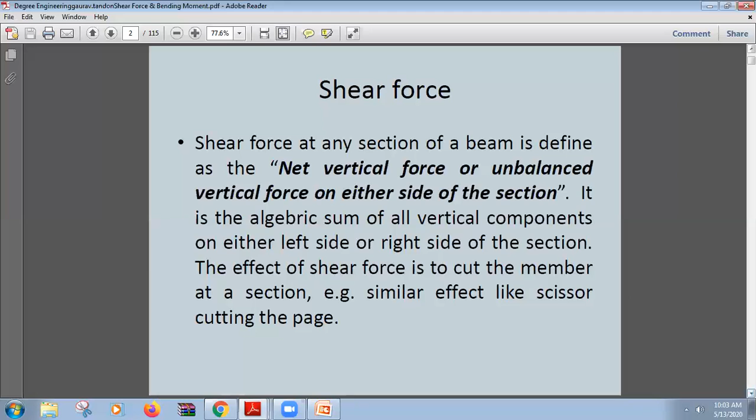On certain sections there are forces that are not balanced. These forces are known as shear forces, and they try to tear the beam apart into parts. So this is shear force: the net vertical force or unbalanced vertical force on either side of the section. Now we'll give an example like this.

You can see here, this is an example. This is the body, in which two forces are acting superficially on the surface of this body, one in upward direction, another in downward direction. Like here we have the example: this is the beam, and this beam is supported by a column, so the upward force is acted by the column.

On the beam we have loading, with the clear span being the part where the beam is not supported. The force vertically applied by the column is this much, and at the same time there is a load on the beam acting downwards. So these are two parallel and opposite forces, trying to tear off this body. This is called shear force.

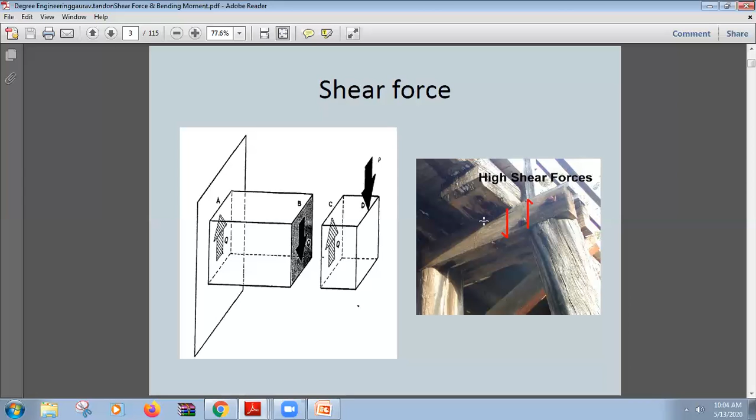Now come to the sign convention. If we take any section of any column, and the force is acting upwards on the left side, it will be positive shear force. Whereas if the force is acting downwards on the right section, it is known as positive shear force.

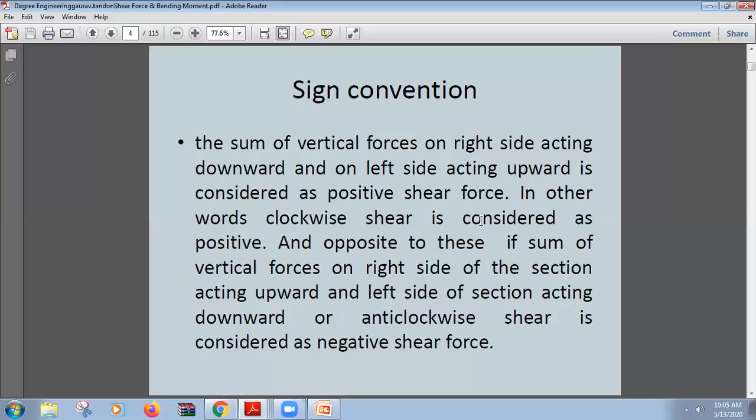Let me come to this picture and show you. If the force is acting upwards in the left section of the beam, this is known as positive shear force. Or vice versa, if in the right section of the beam the force is acting downwards, it is also known as positive shear force. And the vice versa is also true: if in the left section the force is acting downwards, or in the right section the force is acting upward, this is negative shear force.

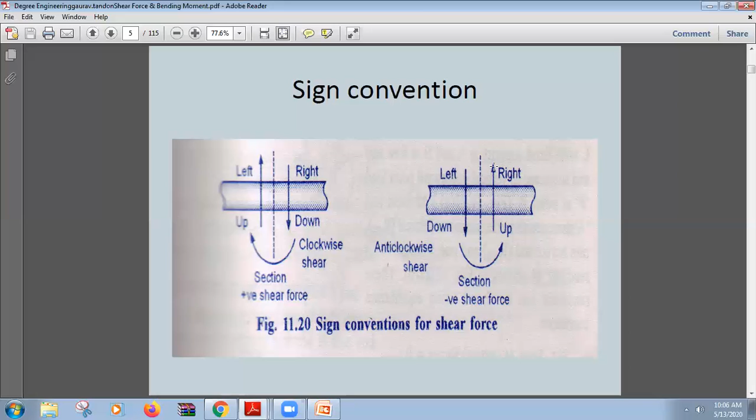Shear force is quite easy and simple. You only need to keep one thing in mind: check the left portion. If it is upwards in the left portion, then it is positive shear force. If there's no clear indication on the left portion, go to the right part and check whether the force is acting downward, which is positive shear force, or the vice versa. If we find the left section has force acting downwards, or the right portion has force acting upwards, this is negative shear force. This is quite simple and clear, I hope.

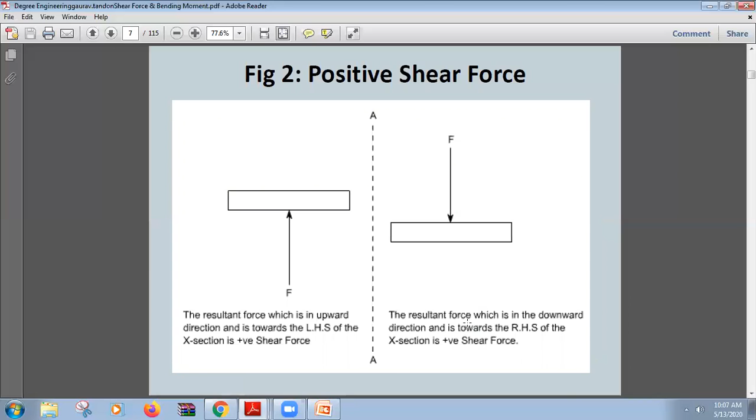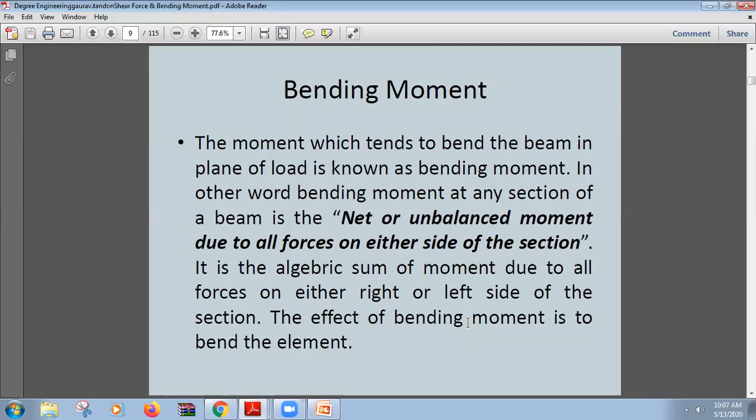Now, bending moment is a type of moment that tries to bend the beam. So moment, as we know, is a product of force multiplied by perpendicular distance.

Let me tell you about the sign convention. There are two types. If the beam is bent such that its belly or stomach is downwards, it is positive bending, and this condition is known as sagging.

Sagging, like we see in our homes, where we have a wire on which we put our clothes to dry in the sun. If the wire bulges downwards, that is known as sagging.

The reverse case is known as hogging, where the convex or center point comes up, and the bending moment is taken as negative. We just need to keep one thing in mind: if it's sagging, the convex faces towards the earth, beneath; the opposite direction is known as hogging.

So in sagging, the upper part is compressed, whereas the lower face is under tension, meaning the lower face expands and the upper face compresses. Similarly, in hogging, the upper face is in tension and expands, whereas the lower surface is under compression and contracts.

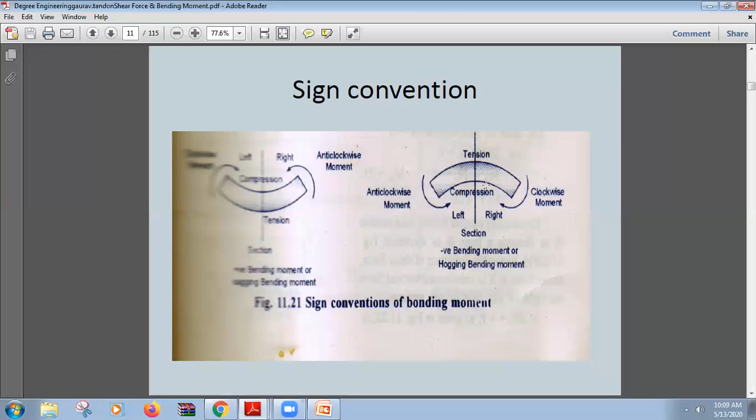So these are the two sign conventions of bending moments: sagging and hogging. For sagging it's positive, for hogging it's negative. Now these two are shown here: sagging as positive bending moment, and hogging as negative bending moment.

Now we'll study the first beam. We talked about the types of beams we have studied, and at the same time we studied the types of loading. A cantilever beam, as I mentioned, is a beam supported only at one end, with the other end free.

So here we are having this type of support. We are having a cantilever beam that has one end supported and another free. We will analyze the cantilever beam first, and draw its bending moment diagram and shear force diagram.

You can see we have a beam supported at one end and free at another end, and the length of span is L. Point force P is acting downwards at the free end, at point B. A point load P is acting downwards at free end B, and there is no other load except this P. This is supported at the fixed end, from beneath, with reaction R A at point A.

This reaction basically will have a combination of reactions: one is vertical upwards, another is horizontal. I told that when this is the condition, the reaction at the hinge, the reaction of the rigid end, is inclined. So this inclined reaction basically has two components: one horizontal and another vertical.

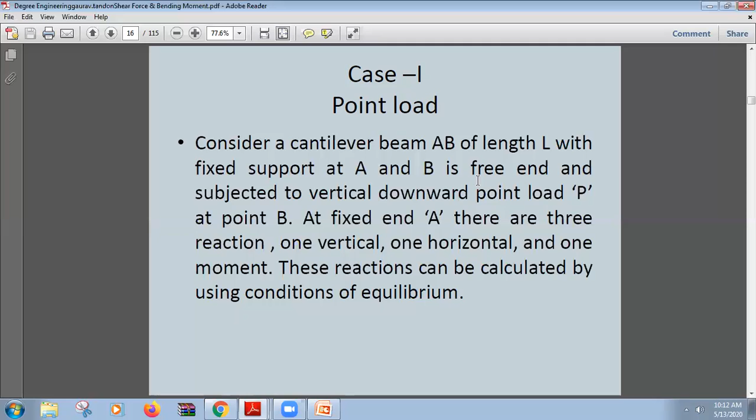This is what I was telling about. We have a cantilever beam of length L, fixed support at A and B is the free end, and then we have point load P at the free end. This is what we have to find - this is the way of finding the reaction, and the way of finding shear force and bending moment.

As I told, the horizontal component of R is 0. Since the beam is under equilibrium, all the vertical and horizontal components must neutralize each other, so we can say sigma Fx is equal to 0, sigma RH is equal to 0. As there is no other horizontal force, we know RH is equal to 0.

In my last slide, I told that RH has no balancing force, so that is 0. This will not affect at all. Similarly, sigma Fx is also 0, since there is no horizontal loading of the beam for the time being.

We'll take this up later on. At a later stage, when we'll be calculating the shear force and bending moment diagram of beams, we'll have many problems where we have to face horizontal forces as well. But right now, for this basic step, we are not considering any horizontal force, only vertical forces are there.

So this way we can find RH is equal to 0, and RAV must be equal to P, because there are only two forces, one acting downwards and one acting upwards. The vertical component of R acting at A, which is RAV, must be equal upwards, and P must be downwards. So RAV must be equal to P.

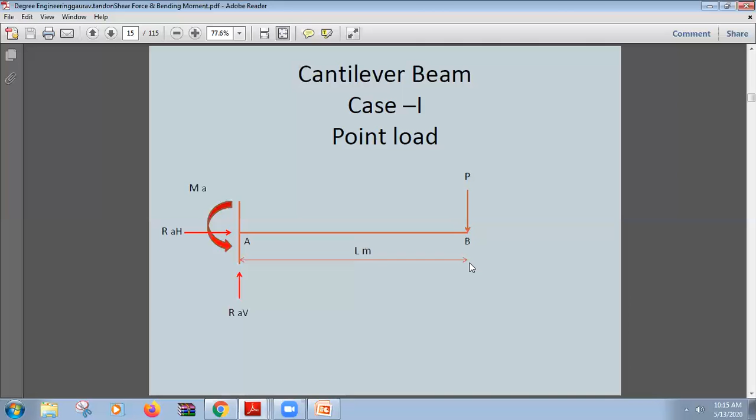B is the free end and there is no support from beneath, so the P force will deflect the beam at free end B vertically downwards. We will discuss this point later on. Right now we have concluded that moment is P into L, and RA, the vertical reaction, is equal to P.

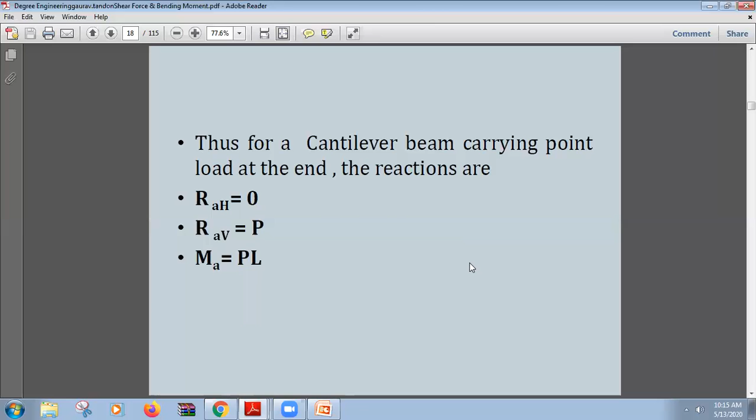Now come to the shear force diagram. How is this drawn? If we take any cross section x at a small distance x, we will find the moment is P into x.

Now this is the shear force diagram and bending moment diagram. What are these and how will they act? First of all, when drawing the shear force diagram, take the right section, take the left section, and find whether the force is acting upwards or not. So if we take any section on this beam, say we have taken this section, what we'll find is...

We'll see that on the left of the section there is only one force, that is the reaction R, acting vertically upwards. So when this vertical reaction acts upwards, that is the only force on the left section.

As I told you, the sign convention is that we check the left section first. If the force is acting vertically upwards, the shear force is positive. So this is the case: we have only one force R acting vertically upwards on the left section of the beam, which means the shear force is positive.

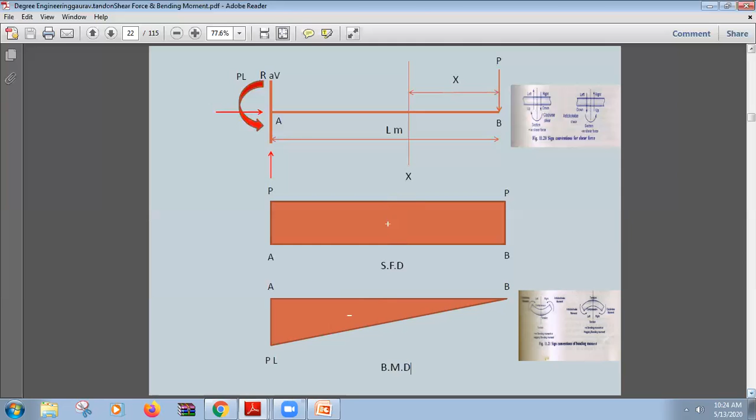Now we will take another beam. This was the case of a cantilever beam. Now we'll take a cantilever beam with another type of loading. This is again a cantilever beam, and this is a uniformly distributed load.

Uniformly distributed load means there is no point load, only load uniformly distributed all along the span of the beam. Uniformly distributed load is given as per meter or per unit length. So we have seen it is given as W kilonewton per meter, and L is the length in meters.

So the total force that will be acting will be W into L, at the center point. If we have to replace the uniformly distributed load with a point load, then we will take uniformly distributed load W multiplied by length of span, W into L, acting exactly at the center of the beam.

So this will be acting at this point, and the beam again will be slightly deflected down, bending downwards. So again we'll see the shear force diagram. We'll see the direction of the resultant force acting in the left section is upwards. So the reaction R will be upwards, and this force is acting here, W into L, and the reaction RAV will be W into L. So the force will be acting vertically upwards, and shear force will be positive.

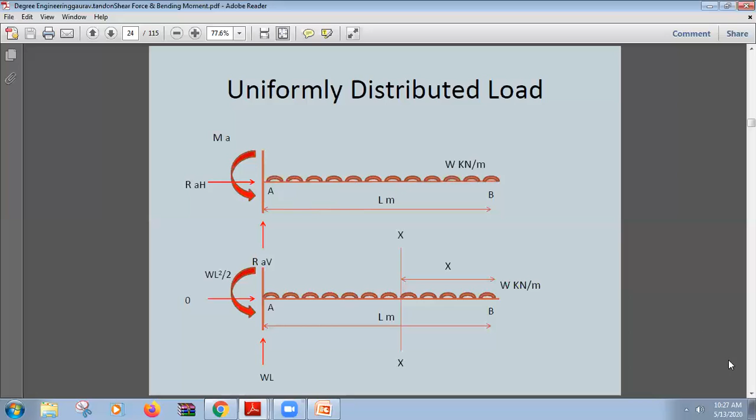This is bending moment - another point I forgot to discuss is the point load. This uniformly distributed load is converted into a point load, acting at the center of the beam. So the point load will be W into L, and the length by which we multiply to get bending moment is L by 2. So the bending moment will be WL into L by 2. This way you can see the bending moment is W into L by 2, and we've got bending moment of WL square by 2.

So this way you can see the shear force and bending moment diagram. Now I'll conclude that we've got shear force positive as told earlier, and bending moment negative. When we converted this uniformly distributed load into point load, we got a point load at the center of the beam. So for this point load acting at the center, we don't have any loading at this point - the free end B doesn't bear any load.

And the extreme point A will have maximum load, and that is W into L. So we start from zero - as I told, the shear force will be positive. We start from zero and this keeps on increasing up till W into L, which is the maximum force acting on this beam. This is the positive shear force, starting from zero up till maximum, because the vertical reaction will be equal to this downward force, W into L.

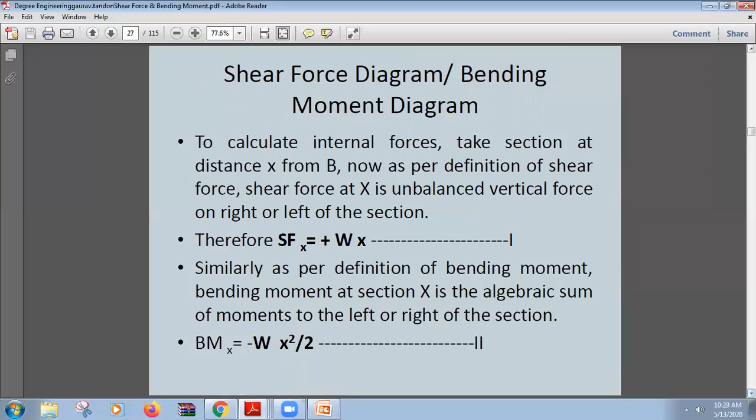So we can see at this point the load is zero, and the load keeps increasing up till this point. But you can see this is a quadratic equation - bending moment, we've got the quadratic equation WL square by 2. So you can see here, Wx square by 2 - bending moment is W into x square by 2 for that particular section, and this way WL square by 2. So this is a quadratic equation.

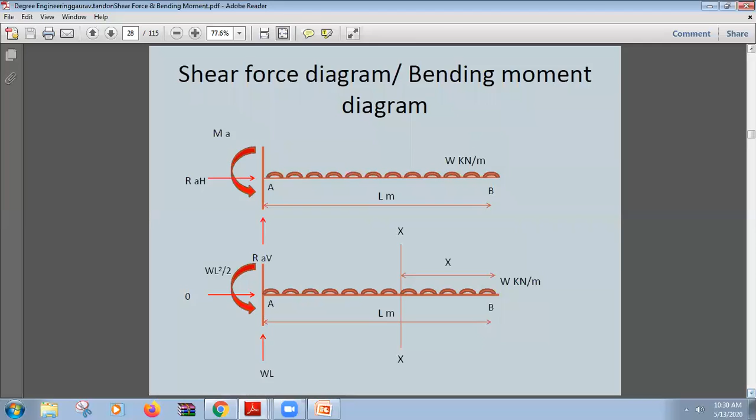So for the quadratic equation, the curve assigned will be WL square by 2, and this way it is a parabolic curve, and this curve is there.

I hope the bending moment diagram and shear force diagram concepts are clear to you.